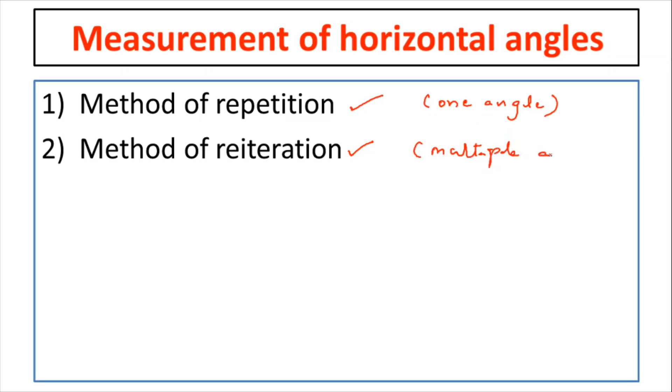Now from a given point, if you have to measure only one angle in the field, then we use the method of repetition. And when we have to measure multiple angles at a station, then we use the method of reiteration. So let us see the method of repetition first. Okay, so as I told, it is used to measure only one angle.

So now suppose there are 2 points in the field, A and B. An instrument is located at station O, suppose like this. Then if you want to measure the angle at station O, then we use the method of repetition. So in the method of repetition, what we do is an angle is measured multiple number of times, and you will consider the average of the angle as the angle at the station.

Okay, suppose you have taken 10 measurements. First time you will get the measurement of 6 degrees. The second time you will get 6 degrees 20 minutes. Next time you may get 6 degrees 15 minutes. Like that you will get n number of measurements. And if you take the average of all these n measurements, then you will get the angle at the station.

Now in the method of repetition, we will take each reading two times: one in the face left condition, another in the face right condition. So we measure the angle both in face left and face right condition, and we will take the average of them. Now at the start of the theodolite topic, I told that the least count of the vernier theodolite is 20 seconds.

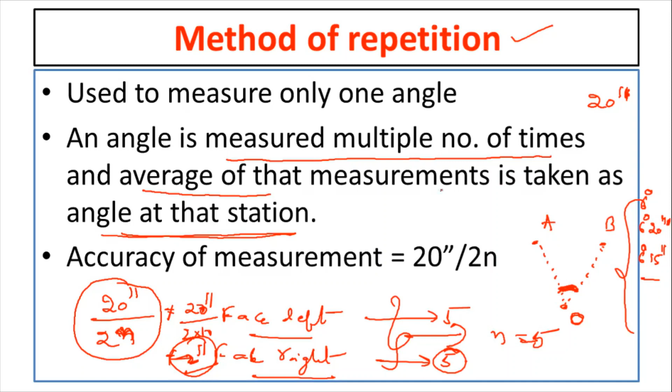So remember this point: in the method of repetition, accuracy of the measurement increases, and the accuracy of the measurement is 20 seconds by 2n. Then there are some errors eliminated in the method of repetition. First one is error due to the eccentricity of vernier. As I told in the starting videos, the theodolite consists of two verniers, vernier A and vernier B. So each time we will take both vernier A and vernier B readings. Taking these two vernier readings eliminates the error due to the eccentricity.

And we will take both face left and face right observation. So that will eliminate the collimation error. So taking both vernier readings eliminates the error due to the eccentricity, and taking both face left and face right observation eliminates the collimation error.

Along with that, there are two other errors eliminated. One is the error due to incorrect graduations. So here in the theodolite, if this is the graduation circle, we are doing the method of repetition here. So first we will sight this point, then we will sight this point.

So first we will take the reading in this direction, then we will take the reading in the opposite direction. That means again we will turn the instrument towards this station and we will take the reading. So because of taking readings in both directions, error due to incorrect graduations will be eliminated. Along with that, error due to incorrect bisection will also be eliminated.

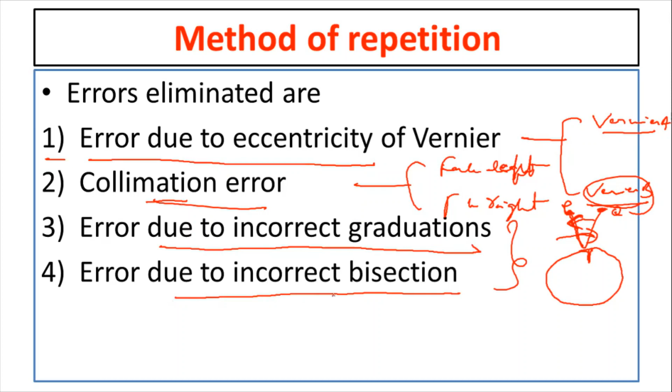So remember that in the method of repetition, totally 4 types of errors are eliminated. First one is error due to the eccentricity of the vernier, second one is collimation error, third one is the error due to incorrect graduation, and fourth one is the error due to incorrect bisection. Now the error which is not eliminated in the method of repetition is slip error. Slip error will not be eliminated in the method of repetition.

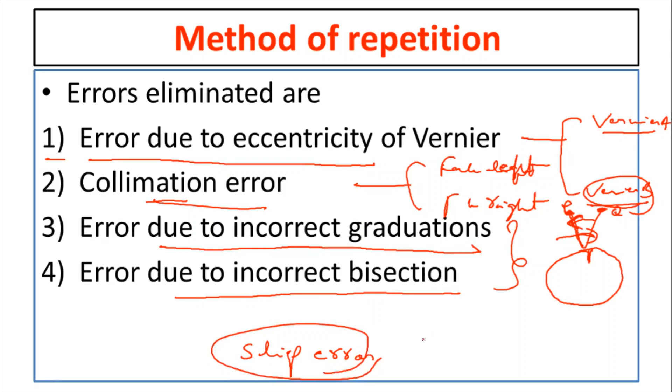Then see the second method, reiteration. This method of reiteration is also called the direction method or method of series. Very, very important question. So this method we use when we have to measure several angles. Suppose here we have placed the instrument and here there are a number of stations like this. If you want to measure all these angles, which method do we use? That is the method of reiteration or method of series.

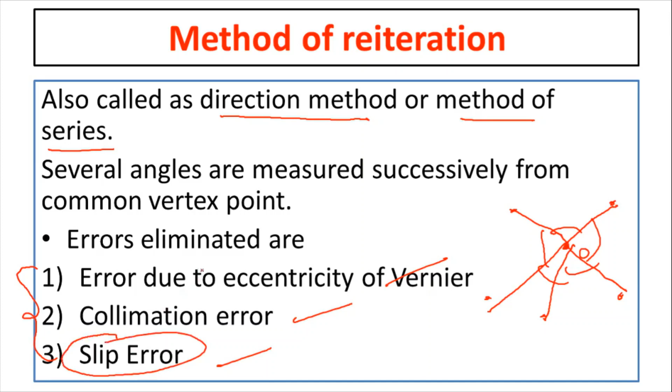So now in this method, the errors eliminated are error due to the eccentricity of vernier, collimation error and slip error. So remember this point, slip error is eliminated in which method? Method of reiteration.

The next one is trigonometric leveling. What is trigonometric leveling? It is the process of determining the difference between the elevations of stations by observed vertical angles. Suppose you take direct leveling: we place the instrument in between the stations and take the staff readings. Then the difference between the staff readings gives us the difference between the elevations. That is what we do in direct leveling.

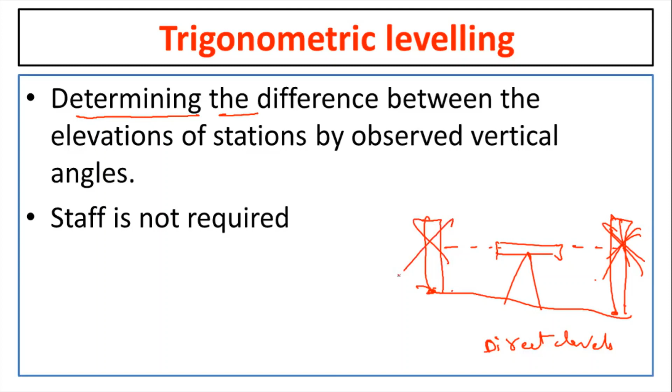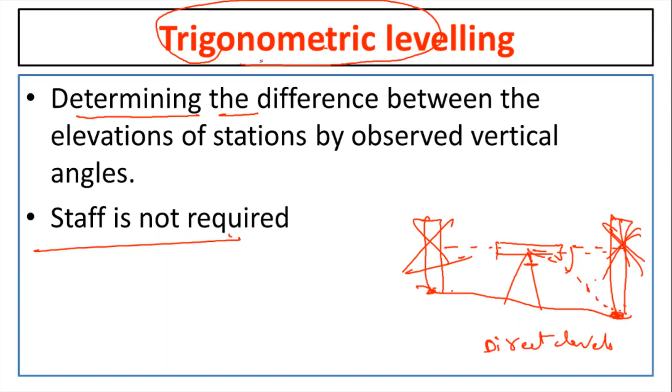But in trigonometric leveling, we will not use the staff. So staff is not required in trigonometric leveling. Instead, we will keep the theodolite here, and using the theodolite you can measure the vertical angle. So by measuring vertical angles, you will determine the elevation of the point, and that kind of leveling is called trigonometric leveling. So remember that in trigonometric leveling, the instrument used is only the theodolite and we need not use the staff. And how to measure the difference between the elevations? By measuring the vertical angles.

So the first case is when the base of the station is accessible. So here this is the base of the station, and we need to determine the elevation of this point. Suppose we want to determine the elevation of Q and the base of the station is accessible. Then you can measure the distance between the station and instrument because the base of the station is accessible. So what is this distance here? D is the distance. Then after measuring this distance, you have to measure the vertical angle towards the station Q. And what is that vertical angle here? Alpha.

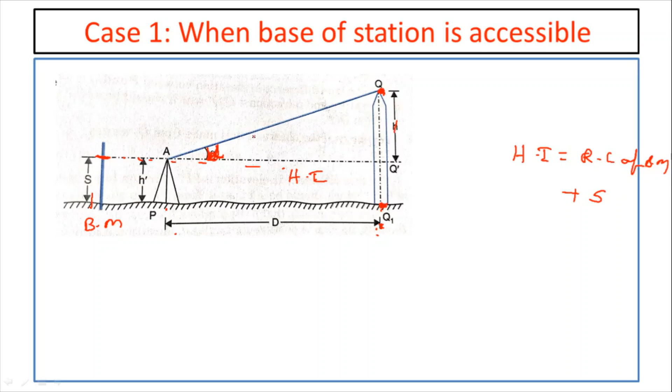So alpha is the vertical angle you are measuring and D is the distance between station and the instrument. So in this case, first we need to take the staff reading on the benchmark. Only on the benchmark you need to take the staff reading. Once you take the staff reading on the benchmark, you can determine the height of the instrument. Height of instrument equals RL of benchmark plus S. Then to that value, if you add this height H, you will get the RL of point Q. So RL of point Q equals height of the instrument plus H. But can you measure this H value in the field? Not possible.

So for that purpose, you have to use some trigonometric calculations. Now, if you take this tan alpha, what will be tan alpha equal to? Tan alpha equal to H by D. So what is H here? H equal to D tan alpha.

So already you have measured this alpha in the field and this D in the field. Then you will get the H here. That H if you substitute, you will get the RL of the point Q. This concept is very, very important for the GATE point of view. So what will be the RL of the point Q here? Height of the instrument plus this height H.

So what will be this height H? That is equal to D tan alpha. So like this you can determine the RL of the point Q. So what will be RL of point Q? If the base of the station is accessible, height of the instrument plus D tan alpha. Okay, that's the thing.

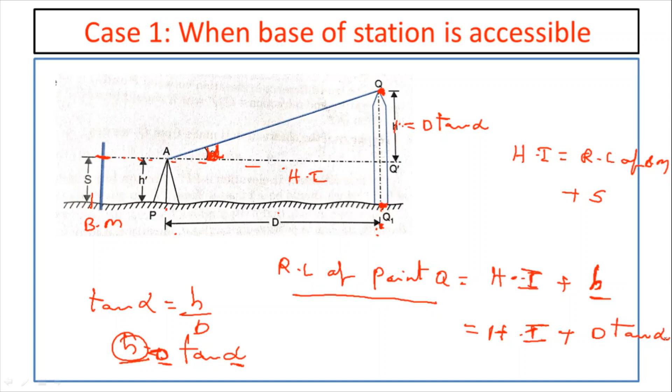Then second case, when base of the station is inaccessible and height of instrument is same at both instrument positions. So now this base of the station is inaccessible. In this case, we have to set up the instrument at two stations like this. And after setting up the instrument at two stations, the height of the instrument at both positions must be same.

So now in this case, we cannot measure the distance between station and instrument. But we can measure the distance between both the instrument positions. So what is that distance? That distance is small b. And once you know the small b and you have measured the angles towards the top of the station Q, they are alpha 1 and alpha 2, then you can calculate this d here.

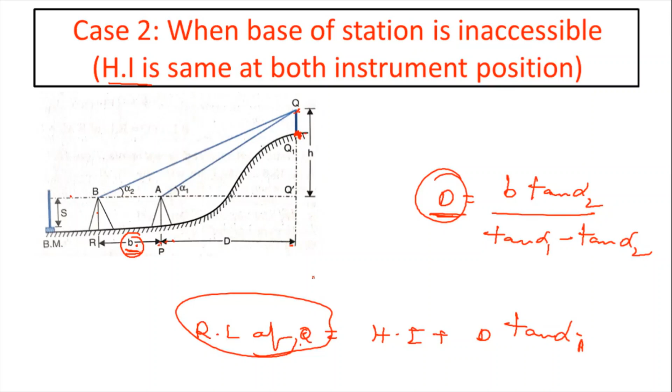So d equal to b into tan alpha 2 divided by tan alpha 1 minus tan alpha 2. So using this formula you can calculate the d. Once you calculate the d, what will be the RL of Q here? RL of Q equal to HI plus d tan alpha 1. So if you substitute this d value here, then again you will get the RL of the Q. Okay, so this case is also somewhat important, but it's not important for exams where the calculator is not allowed.

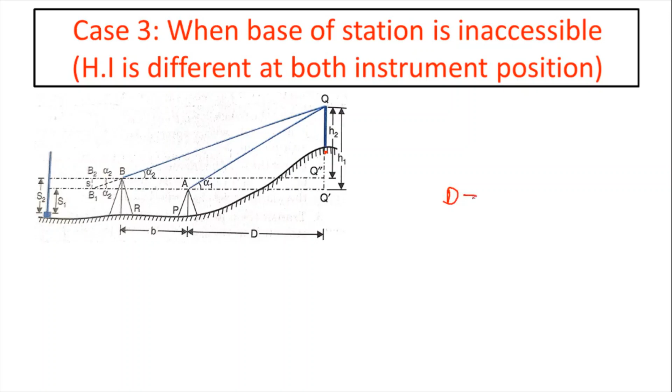Then next one is case 3, when base of the station is inaccessible, but the height of instrument is different at both instrument positions. So in this case, if you want to determine the elevation of the point, first again you have to calculate the d value. So this d value will be s plus b tan alpha 2 divided by tan alpha 1 minus tan alpha 2.

Okay, so if you compare the previous one and this one, additionally we have to add this s value here. So what is s? That is the difference between backsights taken from both instrument positions. From here you are taking the staff reading and from here you are taking the staff reading. This difference between the staff readings is called s.

So to this b tan alpha 2 value, if you add the s value, then you will get the d value. Once you get the d value, again by the same procedure, you have to determine the RL of the Q. So like this we will determine the elevations in the trigonometric leveling. So that's it about the trigonometric leveling, and in the next video we are going to see the tacheometry, which is a very important topic.